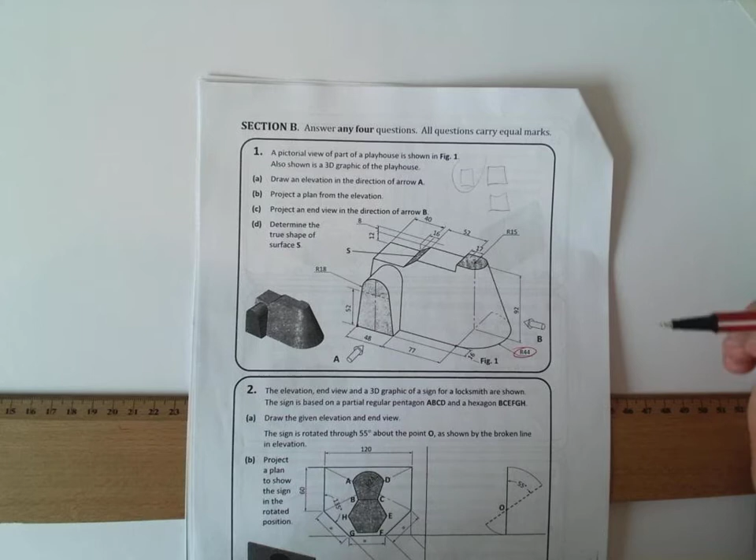For instance, we're told to project an end view in the direction of arrow B here into the right hand side. So when we project into the right hand side, the end view is going to be projected out to the left hand side on our drawing. So that's my elevation there and my plan, and then that's going to be my end view over here. So I'm going to use this as my starting point, and I'm going to work my way across. I'm going to put in some measurements.

As I said in other questions, I'm going to go through this slowly and explain different concepts, and you can just drive on, skip to the part that you're stuck with, and so on.

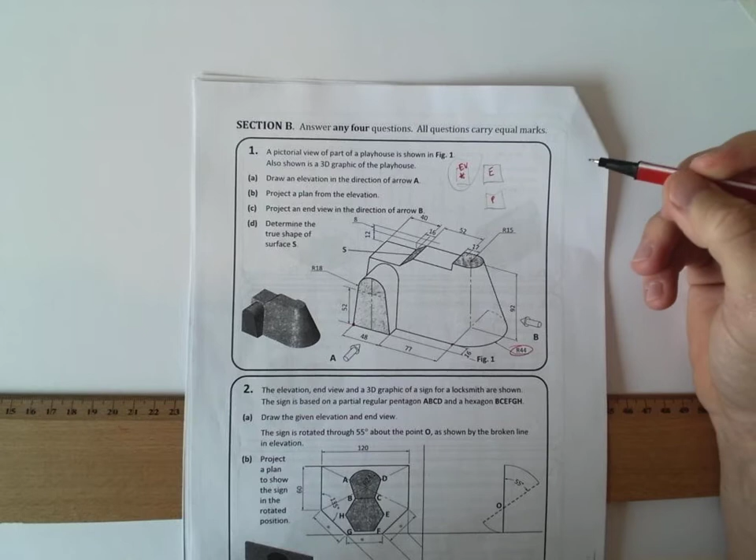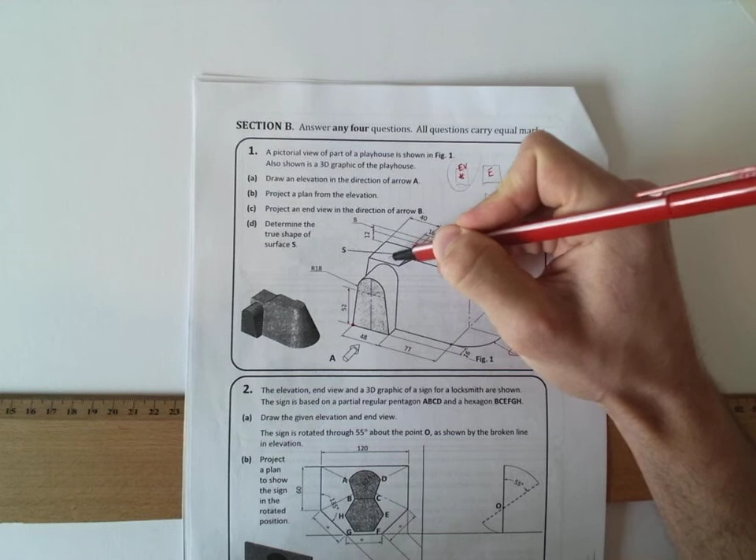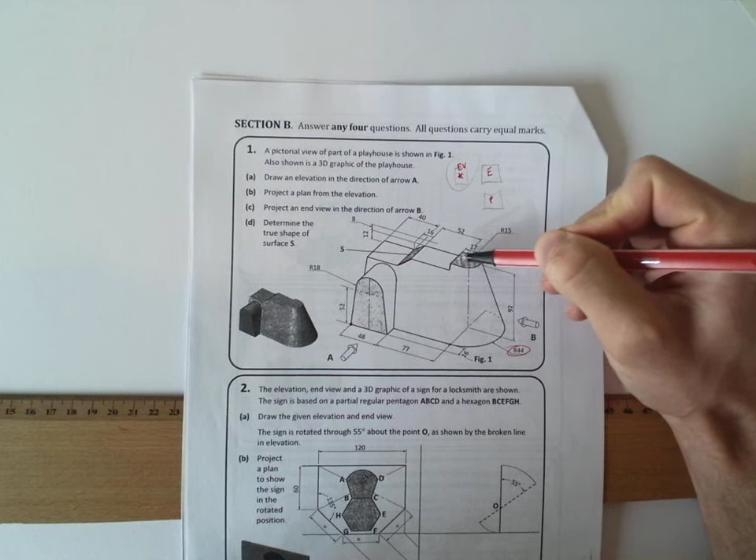Just another thing to note, the top here, it seems to be starting off narrow and then gets wider at the bottom. So this surface here, those lines seem to be parallel to each other, and this surface here seems to be parallel. So it looks like this here is going to be jutting out, and our surface S here, the wings of it almost, are going to be jutting out as well. So we're probably going to have to project an end view first before completing our plan, to find those widths at the top. So we'll go ahead and start off and draw our elevation first.

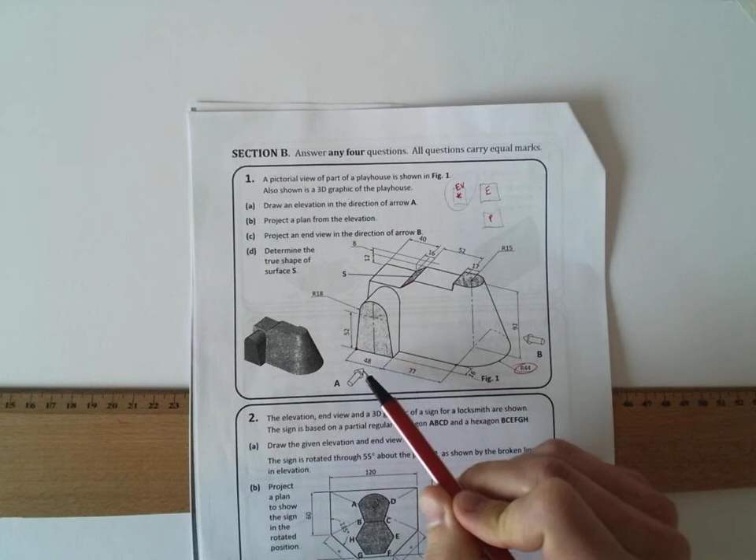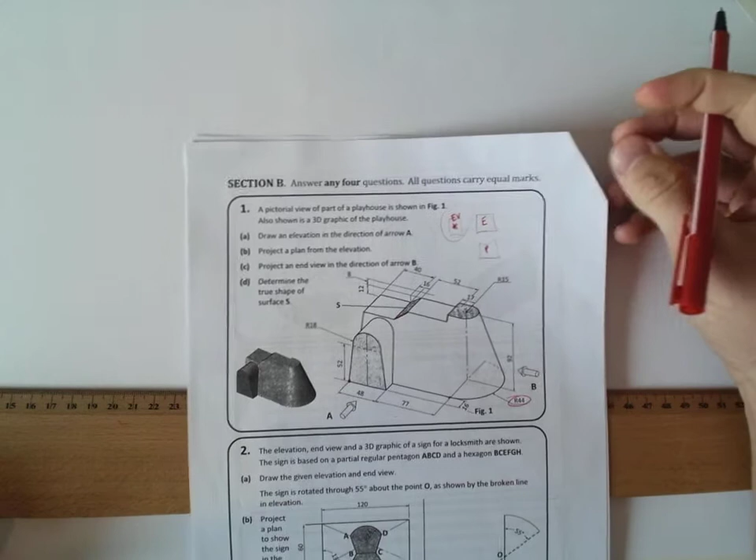So first thing to note, the height of the overall thing is 92, and the overall width 48, 77 is 125, and 44, so that's 169. So I'm going to come in about 180, give yourself plenty of room, and come down about 100 off the top of the page. Okay, I'm just going to stick up this question for me.

Okay, so the overall height 92, so we're going to come down about 200. What did I say? No, sorry, 92, so we're going to come down about 100, 110. That should be plenty. I'll just draw a horizontal line there, nice and light. And the overall width we said was about 169, so if we come in 200, maybe that should be fine. And I'll just draw a vertical line there. Okay, so elevation is going to be here. 92, yeah, there was room.

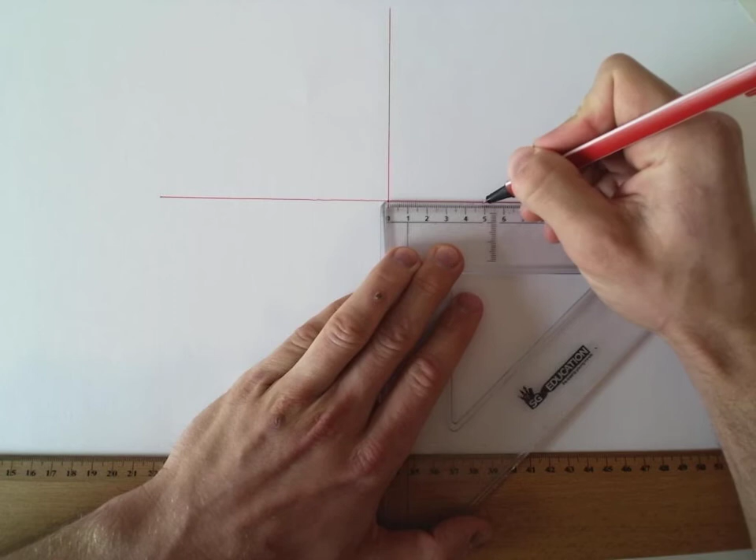Okay, so put in some measurements. So working from the bottom across, 48 is our first one, 48, and 77. So as I said previously, you guys don't need to wait for me, you can drive on and don't have me slowing you down. And then 44 is our bottom, so that's the radius in the bottom right. You'll see that R44, so that just means it's another 44 out, and it's going to be a curve.

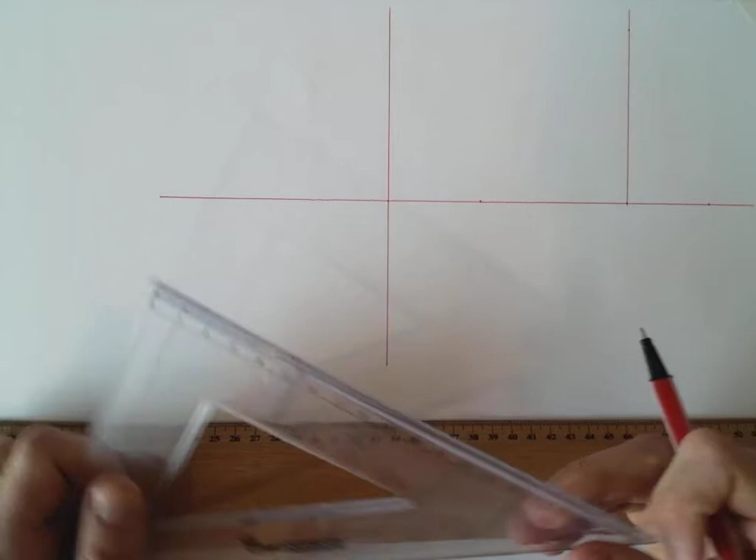Overall height, so I'm going to use this one because it seems like this one is the one with the height 92 on it. So step up 92. So that's coming in another 77, that one. So up to 92. And that juts out another 15. What we do is I pop a little horizontal line there, so I'm not measuring on thin air. Okay. Just get the focus perfect, right. And measure out another 15 up here. Lovely. And what we can do is we can join that down to the bottom, because we know that's the extreme right hand side. Okay, so that's that bit completed.

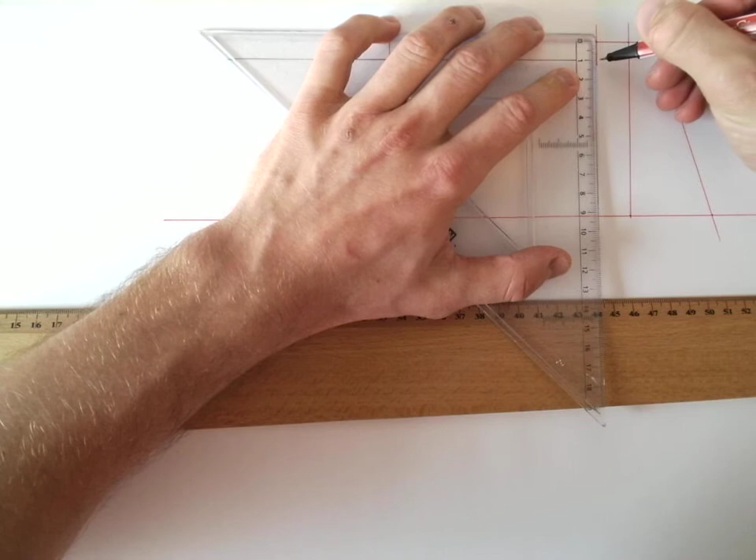We came in 15, we know, sorry, to come in another 17. There. That's a little vertical line there that comes down. Will that look vertical? Yeah, well, and that comes down 8. So we can measure down 8, there's 9, there's 8 there. And that's a horizontal line for 52, but instead of measuring, I'm just going to draw a horizontal line first, and then measure 52 on it. There it is there, 51, 52, yeah, perfect.

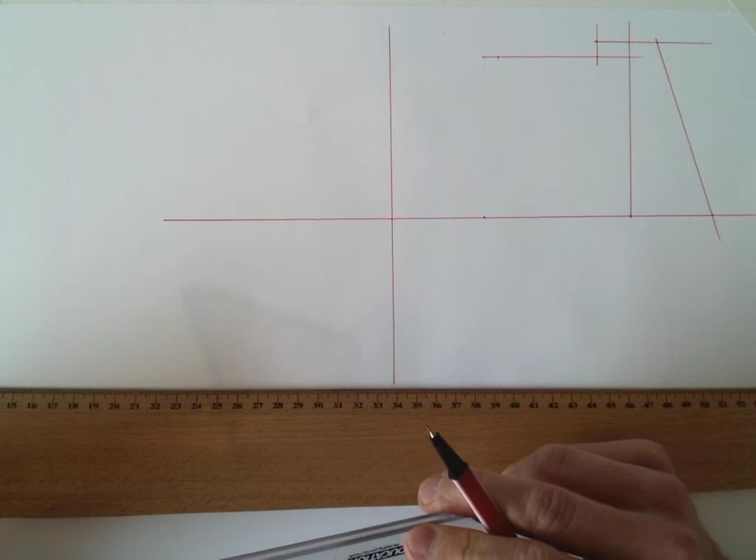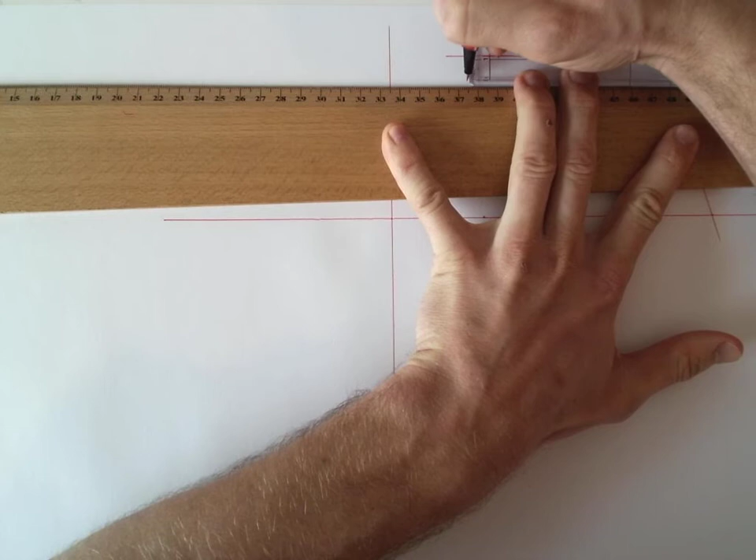Okay, the next part is our surface S. So that's where we are. We're working our way across the top of it now. Excuse me. So 16 across. So I'll just measure across that 16 first, and then measure down the way. So there's 16. So that's our original marker. To make that a bit bigger. So there's our 16, and that has a vertical drop then of 12. Okay. 12. We're not far off it. Yeah, there we go. And then that just finishes it out to the end. That should be 40. Yeah, bang on. Right. Good start.

Okay, so the front part here, 48 is the width of it. So if we just measure in 24, that should be the center of it. And a vertical line there to measure up the 52.

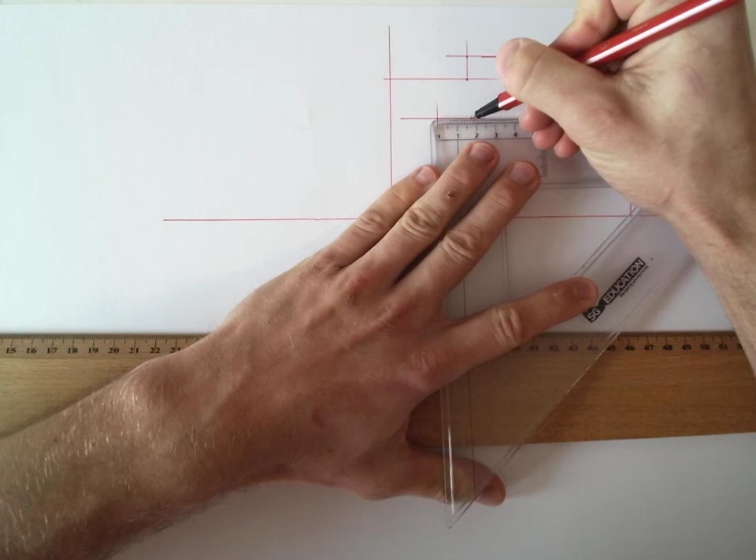52, and we want to pop in the radius here of 18. So I'm going to measure it first. 17 and 18. Use your compass, of course, to construct this because it's just a semicircle. Okay, so I'm going to go over it a couple of times with my compass so you can see it a bit better, whereas obviously you don't need to do that. Sorry. Right. And that goes down to the bottom wings then.

So as I said, guys, anything in red is construction. Anything in blue, I rarely use blue, but when I do, it's only instruction. You don't have to put it on your sheet. And then black is obviously anything in heavy. Sorry, I forgot to complete surface S up here. So I'll actually show you that, how I worked that out.

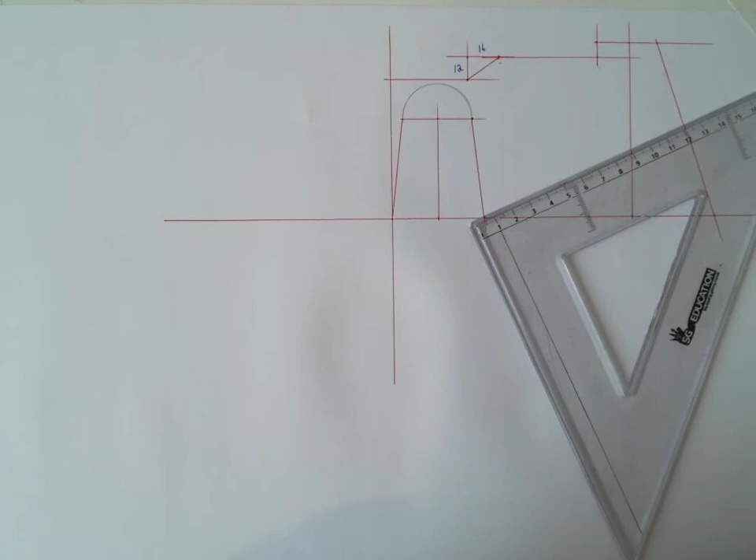So I came in 16 and measured down 12 mil, and then you can just join them up. Alright, so this is when I came in 52 that way, found that point, and that's your surface S there. Alright, so that's very important. That'll be very important down the line. That's our surface S.

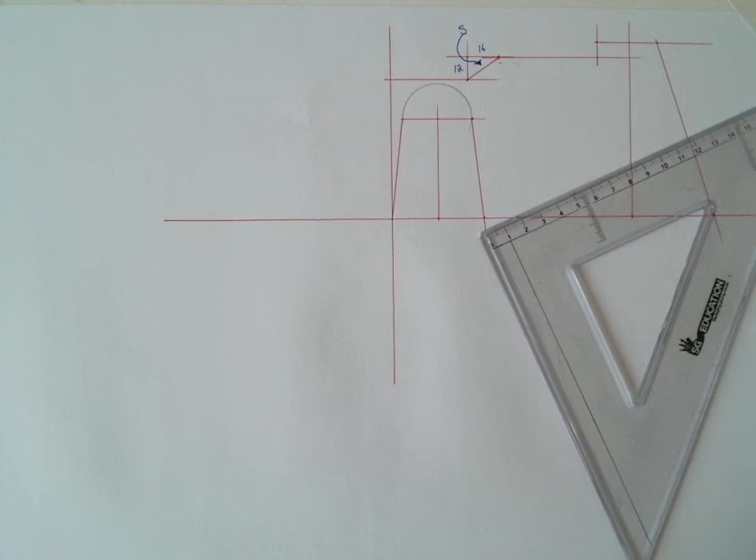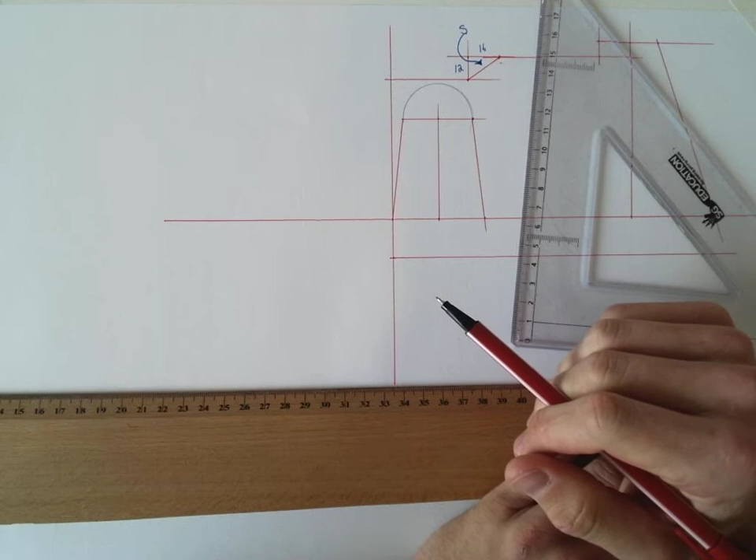Moving on. Okay, we're going to construct our plan. Right, so our plan should be 20 mil below. Should be plenty. So I'll just pop down 20 and draw a horizontal line. We know the full width of it, so it's kind of slanted, but if you look at the very bottom, we're going to work with the radius 44, so that means it's going to be 44 either side of the center line. So from there I'm going to pop in 44, and I'm going to pop out 44 the other side of it. So I'll measure that 44 now.

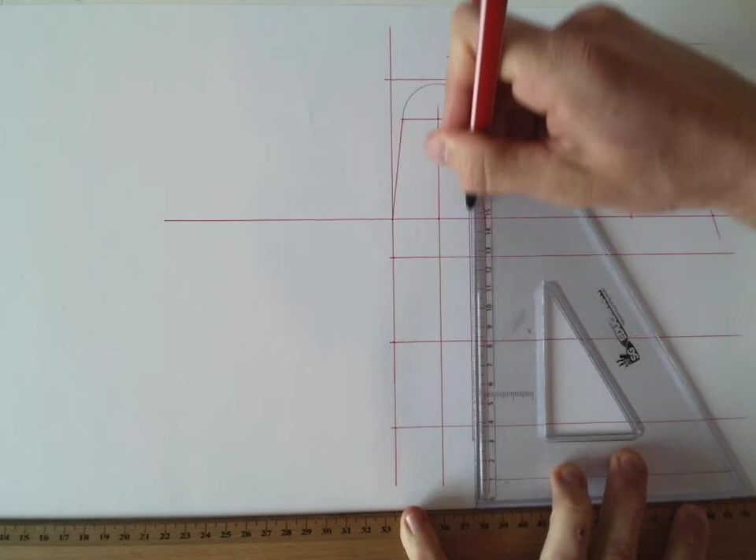So there it is there, right? And that's just going to be the center there, and that's my 44. Next thing, I'll bring all my important lines from my elevation down. Now notice how I go away from the last thing I just drew, so don't go back over yourself almost. Okay, sorry, I know I just did it there, but try.

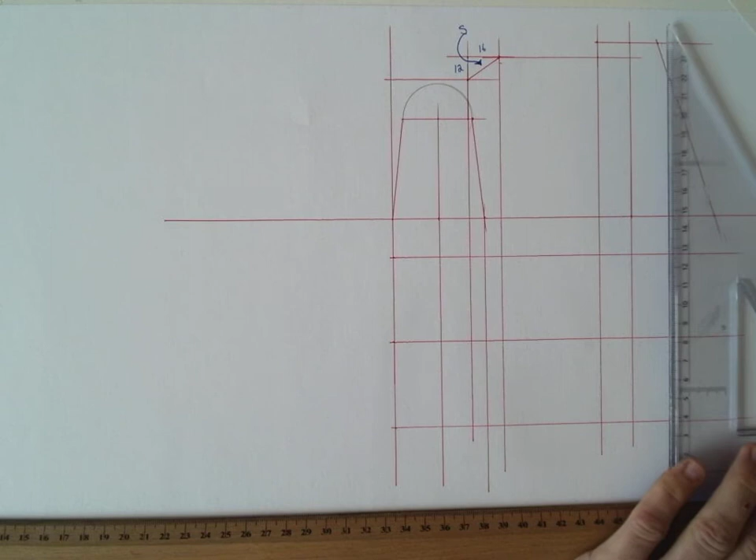When you draw a line, try to work away from that line you just drew. So I just drew a line here, so I'm going to work that way. Alright, I'm not going to go back over myself. It just reduces the risk of smudge, alright, because it doesn't look nice on our drawings. And then that's our last radius there. And we'll find that one ourselves, no bother.

Alright, so the only real width I can put in here is that radius 15 at the top. Alright, so that's the only real width we know, because it kind of looks like it widens as it gets to the back of it. So the only real width we know is that 15. So what we're going to do to help us is we're going to draw the end view. Alright, we're going to draw the end view, and that'll help us find those points on that slanted edge.

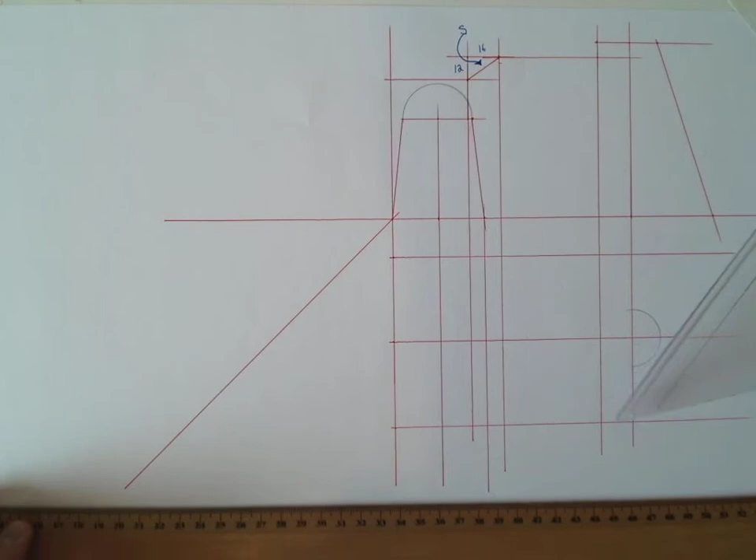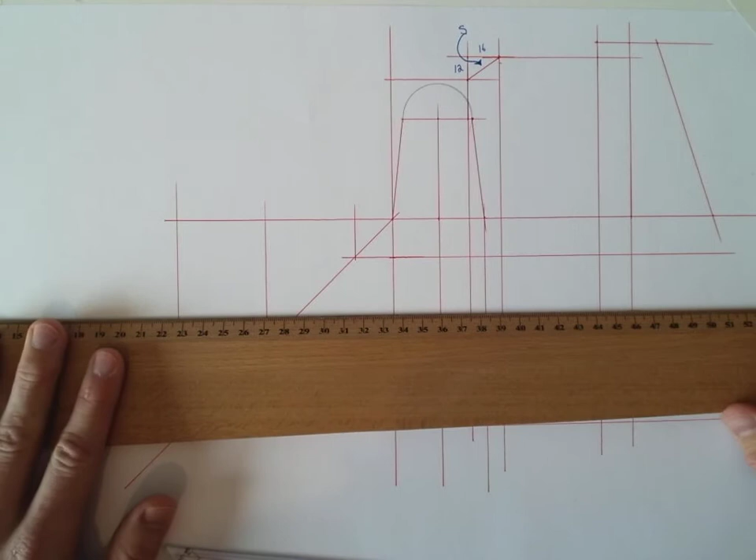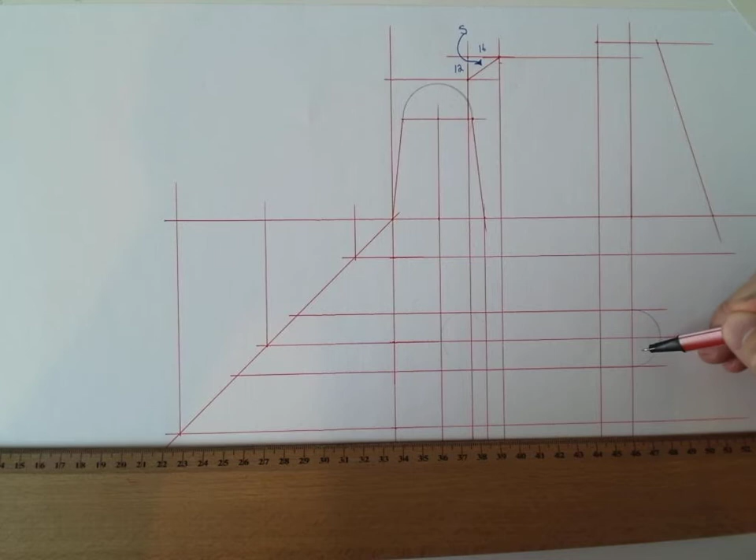So as always, pop off at 45 degrees from our elevation and bring all the widths from your plan across. And bring them vertically up then as well. You can actually bring this 18 across. Is it? No, sorry, it's 15, isn't it? Yeah. So you can bring that across, because that's the only width we're aware of. And if you look at the question, that's an important surface because we know the bottom goes up to that surface. All right. So I'm going to bring that across as well.

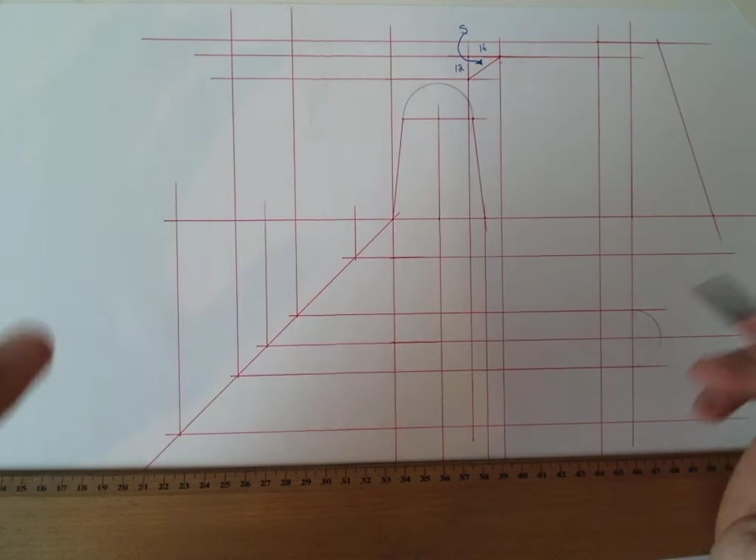So next thing, sorry, bring our heights across. So bring all your heights across. As I said, anything red is construction, so that should be nice and light with a sharp pencil. Okay, you should barely see it. And you know what, I'm going to leave that little bit jutting out at the front to last because there's a freehand curve in it and I don't want to put too many lines on the page just yet.

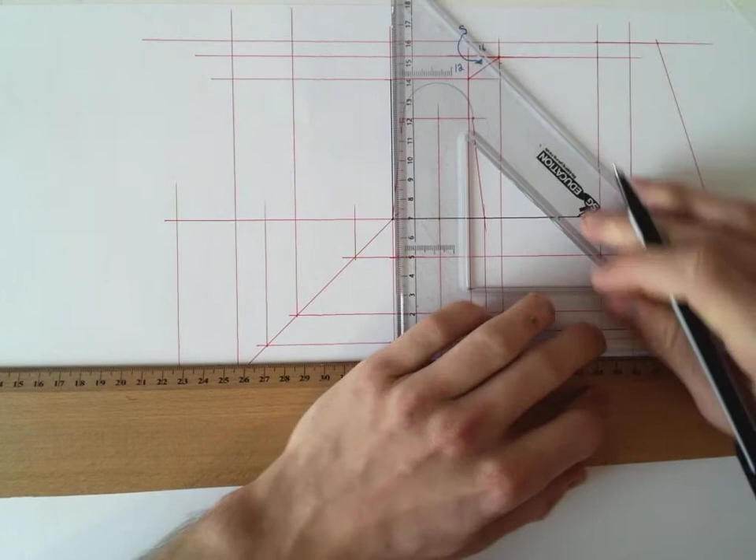Okay, just to make it a bit clearer for you, I'm actually going to put in as much of the elevation in heavy as I can because it's starting to look very red. Right, I want you to be able to differentiate between the elevation and so on. Okay, so I'm going to try to draw as much as I can. So I'm going to put in all my vertical lines first. Okay, and I'll work with my horizontal lines.

So watch how efficient I'm trying to be with my lines. So I'm doing all my horizontal lines together, vertical lines together, and so on. And then the other lines that are angled, you can just go ahead and do them last. Okay, so you can start to see the drawing come together a bit better now when you're using the different... well, I'm using different colors, but when you go on heavier, you'll see the part of the drawing that you want to stand out will stand out.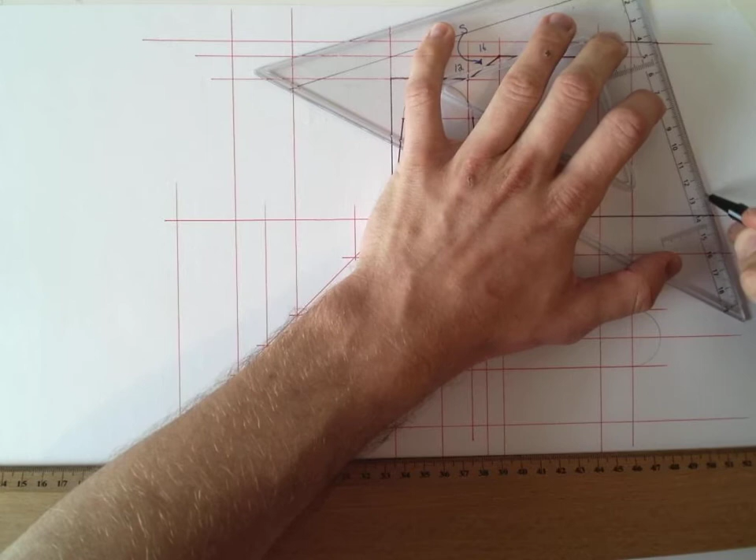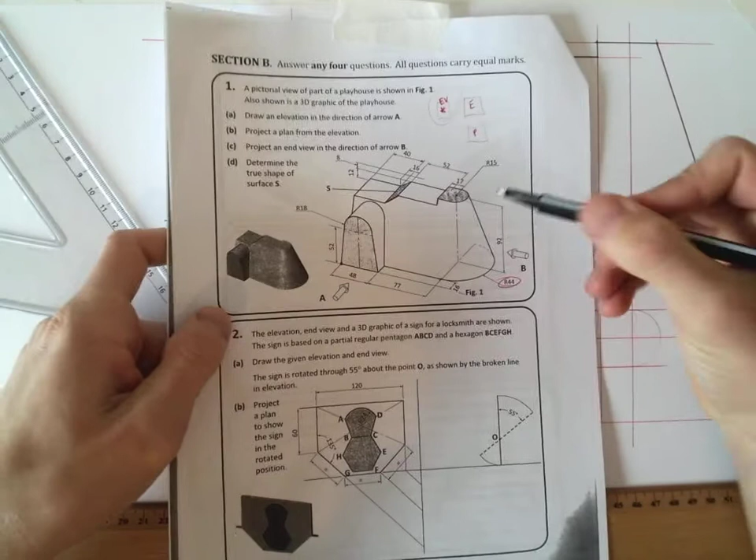Okay, so you can see my elevation right there. Plan, I don't have much of it yet. Okay, so we're going to try do some of this end view. Okay, so we're looking in direction of arrow B. So if we're looking at the question right now, if we're looking in direction of arrow B, the first thing you're going to see is this curved surface. Okay, you won't actually see a definite line, so it'll just be the curve.

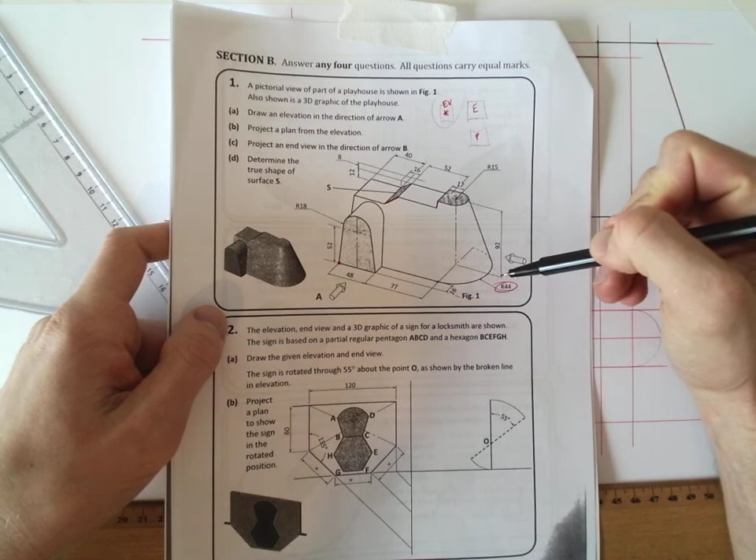But what you will see is the extreme left hand side and the extreme right hand side will just be represented as a line. Okay, so that line, basically, we need to find it. But if you were to draw it here, you would say we need to find it some way like that. Okay, sorry, it should probably be something like this because it's almost like a cone at the front of our drawing. Okay, so that curved surface there is almost like a cone, and you know if you look perpendicular at a cone, you're just going to see the left and right hand side of it.

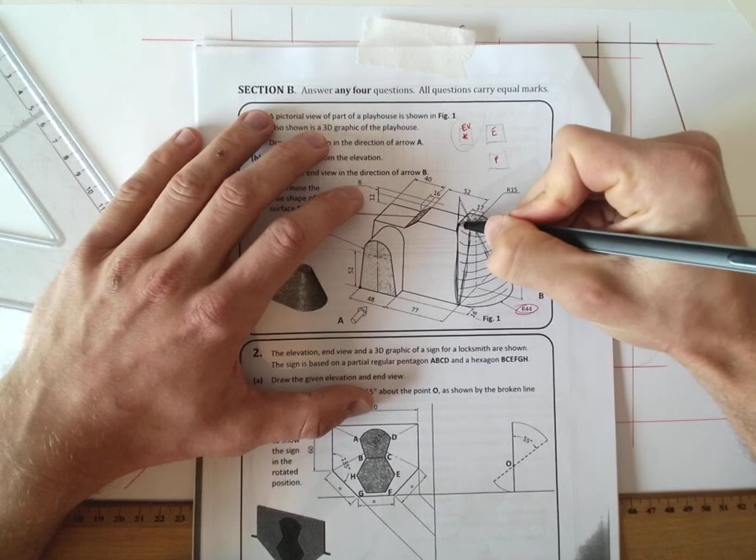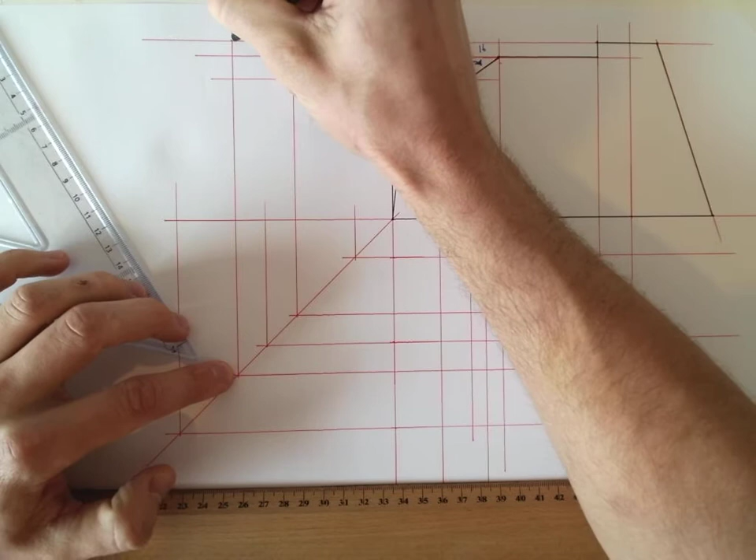Okay, so if I was to extend that on there and extend that on there, there you go, you can start to see the cone come together. So what we need to find is this left hand side and the right hand side, and we know they both join to that height there at the top. So what I did there is this height here is that width. Okay, and we know it joins to that, so I brought that up, and I can similarly do it down here, bring that across and up. Okay, and that's our extreme left and right hand side.

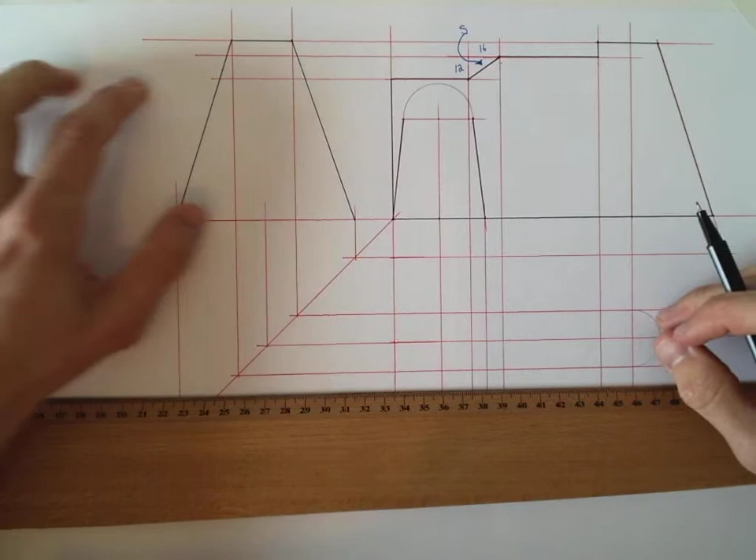And looking at our question, yeah, we can go ahead and put that in heavy. Right, these are two important lines that help us find the widths in our plan. Perfect. Right. And then the top will just be a horizontal line here. Okay. Now to find our widths. So this is where the extreme left and the extreme right of this surface of this object will come into play, because see these edges here, we don't know the width of those in plan. But the end view will allow us to find that. So by projecting across here, when we hit that slanted surface, we bring those down to our plan, and that will help us find them.

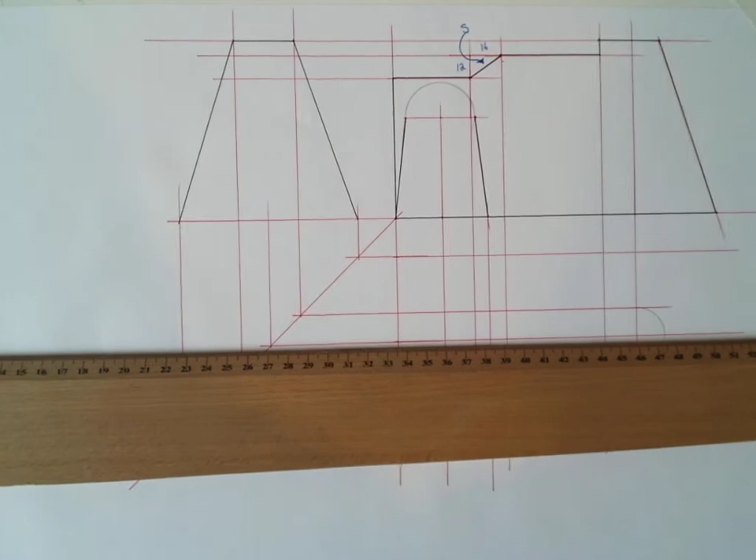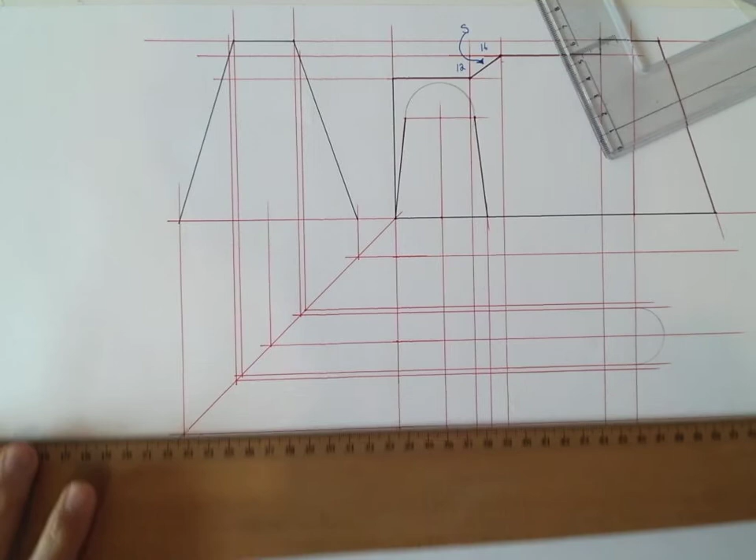Alright, so those that I brought across to our end view, I'm just going to bring them into our plan. And you can bring them across then. Okay, so that's this surface here that I'm trying to find. So this middle surface here. So I'll show you here. So what I'm trying to find now is this surface here on top. Okay, so that surface, the red surface there on top. Okay, so the width of it.

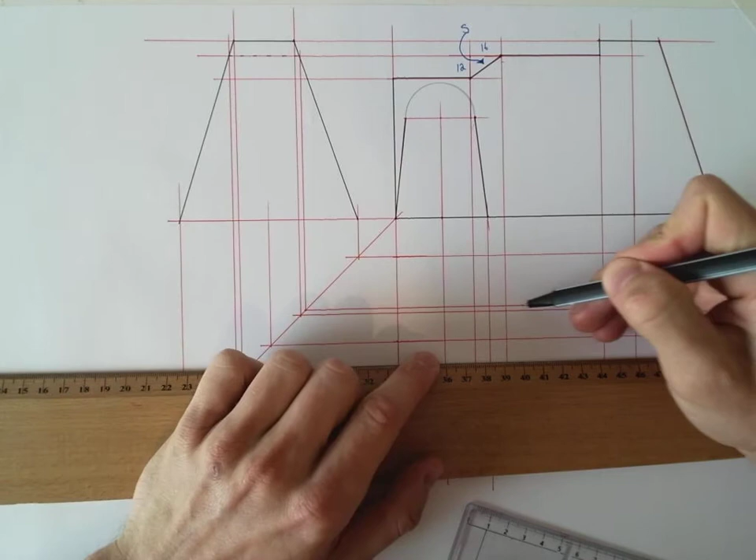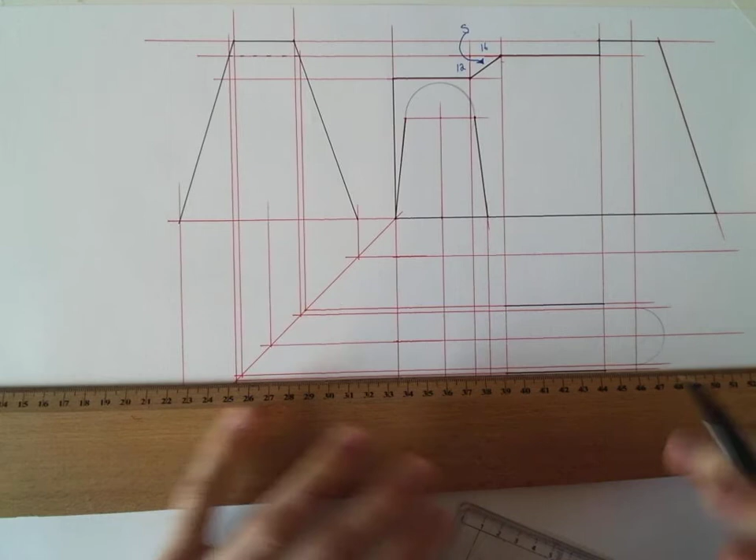So I came across here, and where it hit that slanted surface, I'm actually going to put that in. It's actually hidden detail because it's behind. So you can put that in there. So that's hidden detail there. And when the surface comes down, there it is there. So that means that has to jut out. So here it is here. Alright, so this is probably one of the trickier parts of the question, as it's just hard to visualize. Okay, it's just a small bit tricky to visualize, and that's jutting out that way.

Okay, so we're starting to make some progress. Alright, so that's one of the trickier parts of the question, is just trying to visualize that surface now. Right, surface S. Okay, so we brought our height across, so surface S starts here and it'll actually expand out. So we need to bring those down from our end view and into our plan.

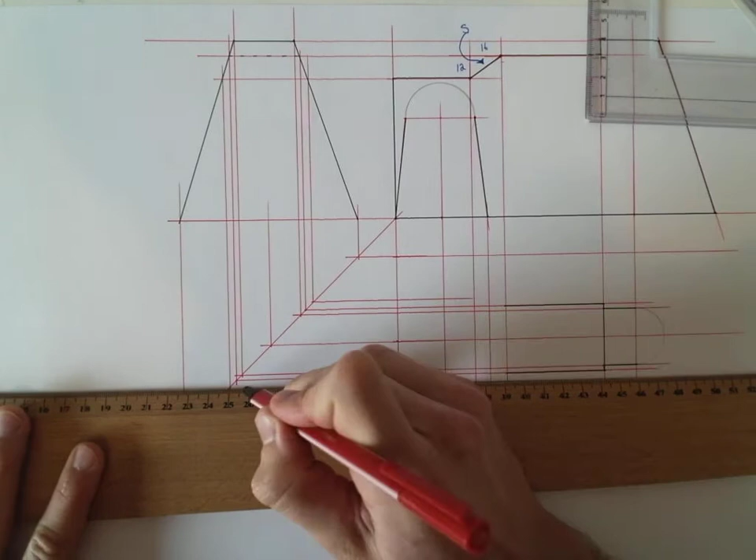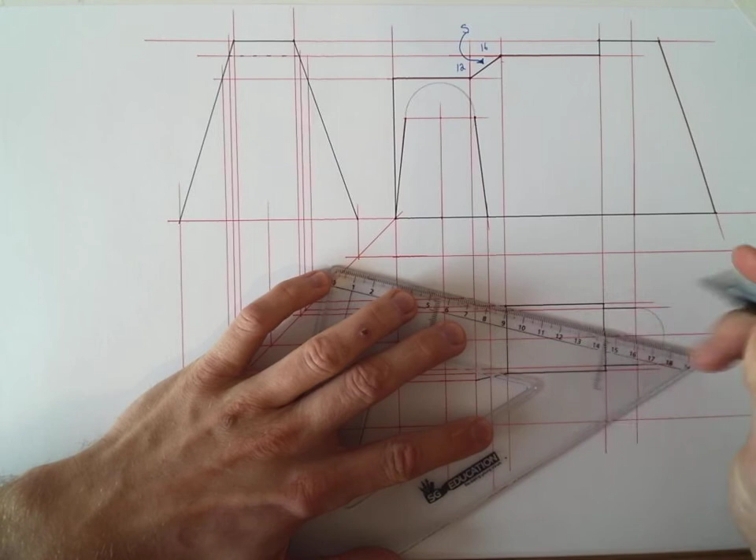Right, that stops there. And here's surface S being completed now. So that's surface S, I'm just after finding here. So that's the very important surface. So we're going to be asked to find the true shape of that surface later on.

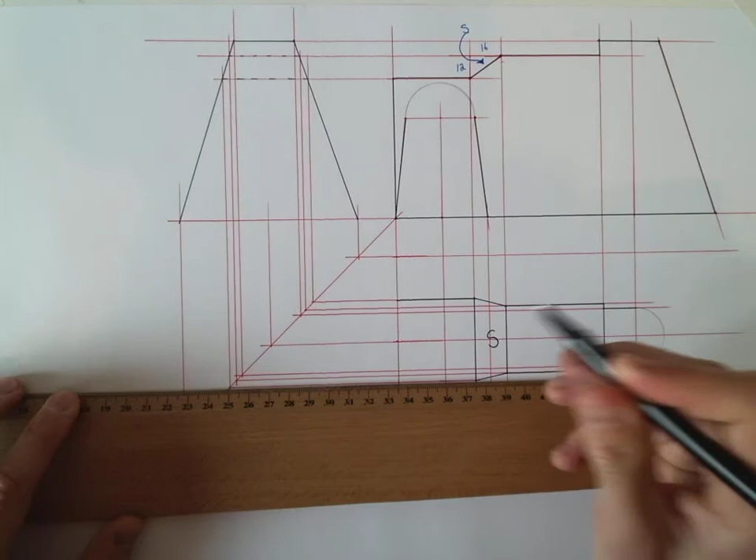And then the last bit, you can see it there. So it's actually hidden detail again. So that's the back of it. So you'd see it's that width. So we can just draw the two horizontal lines in. Alright, so that's very tricky, that bit, trying to visualize how it actually works out. And then the back of it is just a straight edge, so that can be just a vertical line. And I'm going to put in that curve at the front for us.

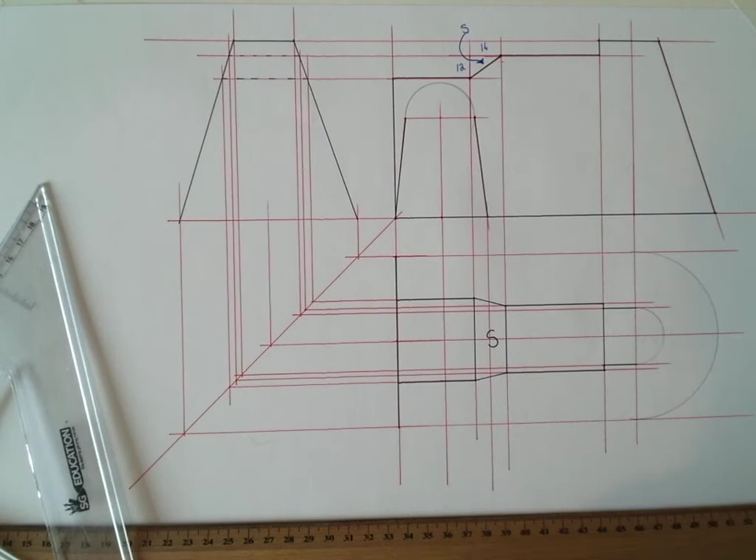So that should be 44. There it is there. Are they on the same center point? They are. Lovely. Alright. So that's 34. Just make sure we're accurate. Okay, so that's the plan almost completed. And there's the 44. And you know what, I'm going to leave that bottom part for a second because there is actually that bit jutting out at the front, so we'll put in that now.

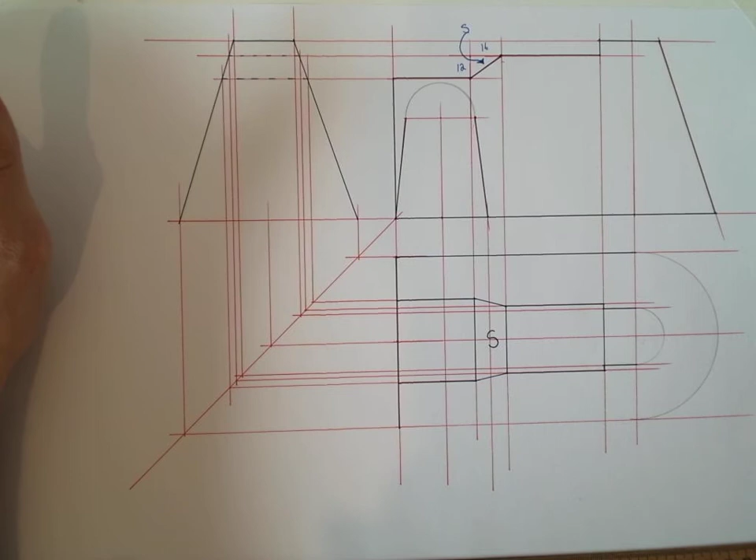So what we've done so far, just to take a little recap, just to check in with you. So the elevation is fully completed, the plan is not fully completed yet. We have to do this bit jutting out the front, and there is a freehand curve. So if we look at our question again, the freehand curve is there. That's the freehand curve I'm on about.

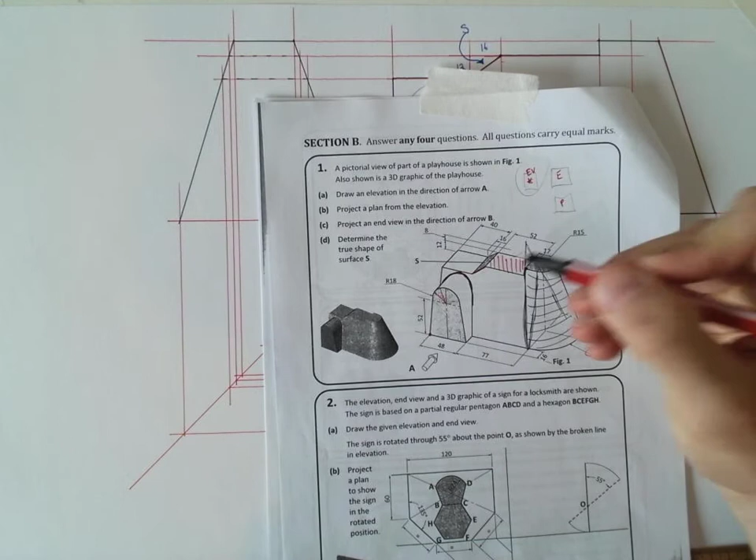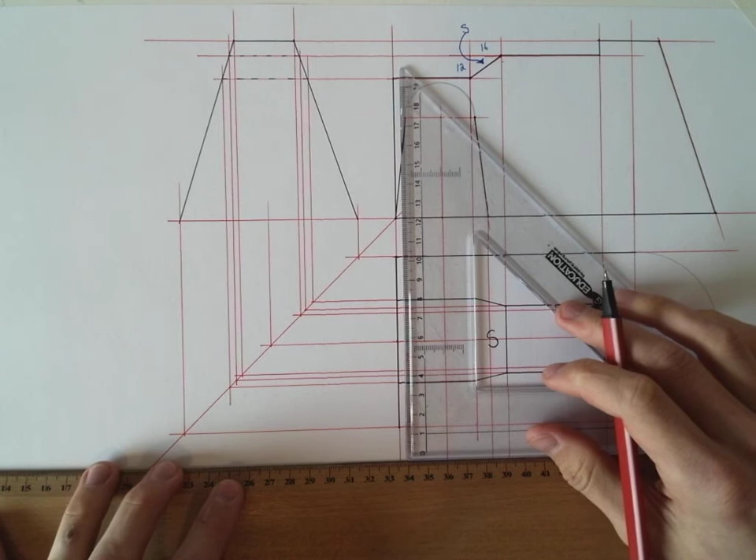Alright, so the way we find that is by 60-30 in our elevation and bringing those points to our end view and then relocating them in our plan. So we'll do that now. So first things first, I'll do the front bit that juts out. So that juts out 16 mil. So measure along a line, 16 mil, extend that bit more. That's not what I should draw, sorry, and that one.

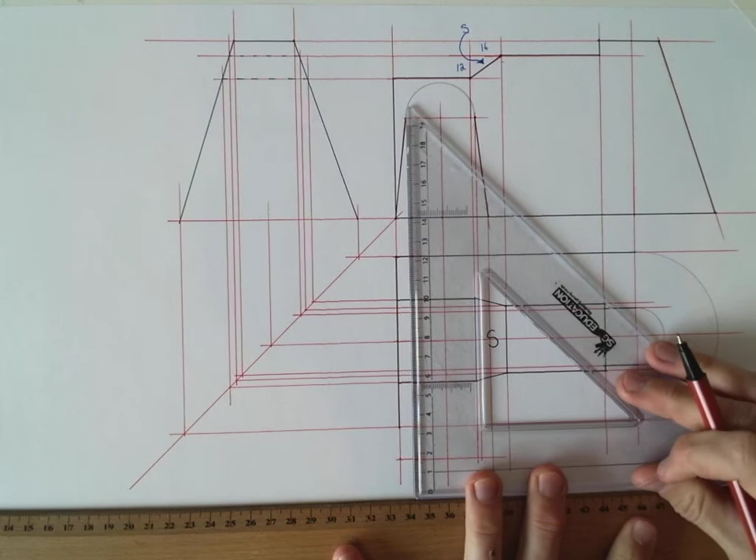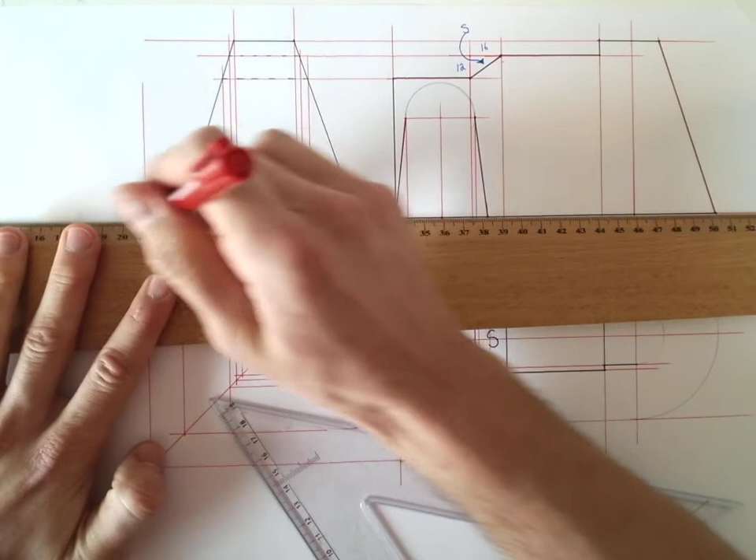And this one here as well. Okay, so that's basically the front edge there. First look at our plan, there you go. And then that juts straight back into the 44, and then that extends on out there. So what we're missing now is this freehand curve here. Right, how do we do that, I hear you say. Firstly, actually, I'm going to complete this end view, the bit jutting out with the end view. Extend that across, bring that out off it, and that as well.

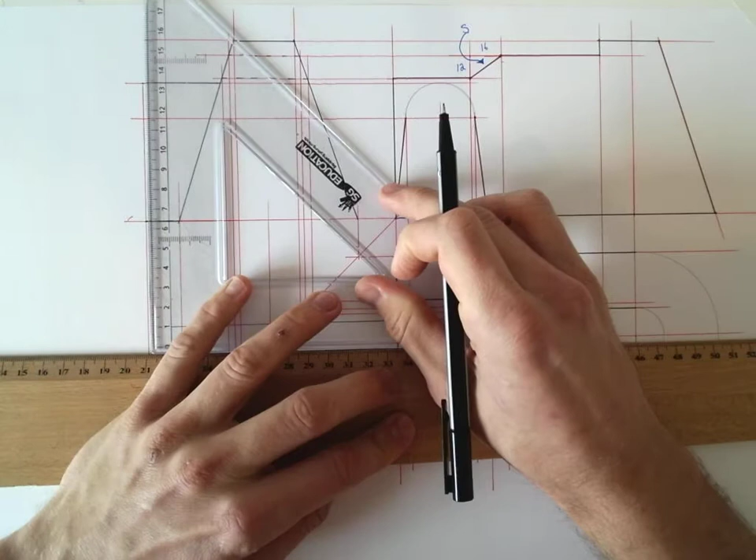So now we need to find this freehand curve. So we're nearly there. 22 minutes in, we're going well. So I need to 60-30 that semicircle in my elevation. Alright, sharp pencil is key here now, because you'll see there's a lot of lines starting to come together on the page. So this is where it's essential to have a sharp pencil and that our construction was nice and light, so we're not confusing ourselves. Okay, so I'm going to number these points here: 1, 2, 3, 4, and 5.

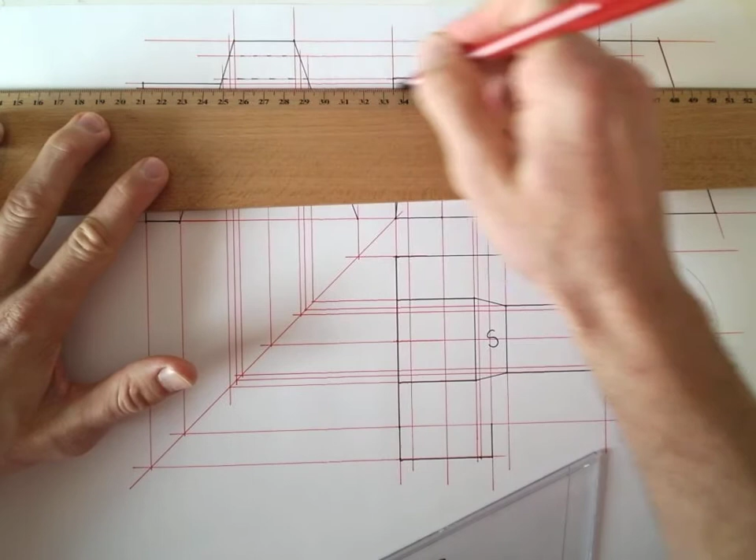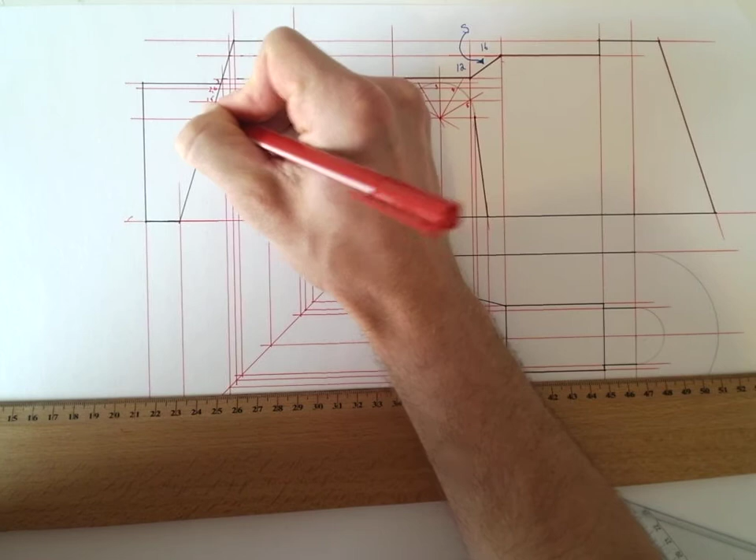Bring those across to our end view as well. And we'll number them on our end view as well. So here at the top is 3. If we were to look in, 2 and 4 are going to be on this. 1 and 5 are going to be here. And then down the bottom, we'll just say that's O. So center O. Okay. So, sorry about that. Here we go.

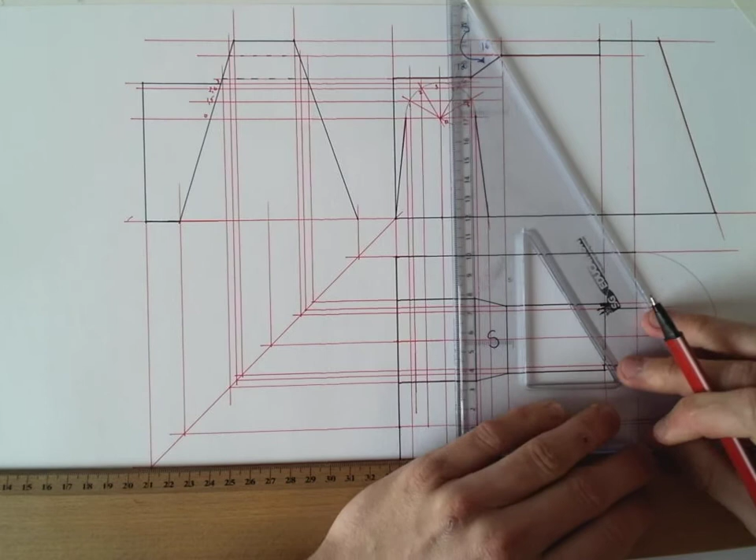So we're going to bring down our points as well into our plan. Alright, so there's 1 brought down, 2, 3, sorry, I should be extending them a bit more. 1, 2, 3, there's 4, and 5 is actually on another line we have already, so that's fine. Right, so what I've done so far: 60-30 my elevation, the semicircle, numbered my points, brought them down, brought them across to my end view, and now I'm going to bring them down from my end view as well. So do we need O?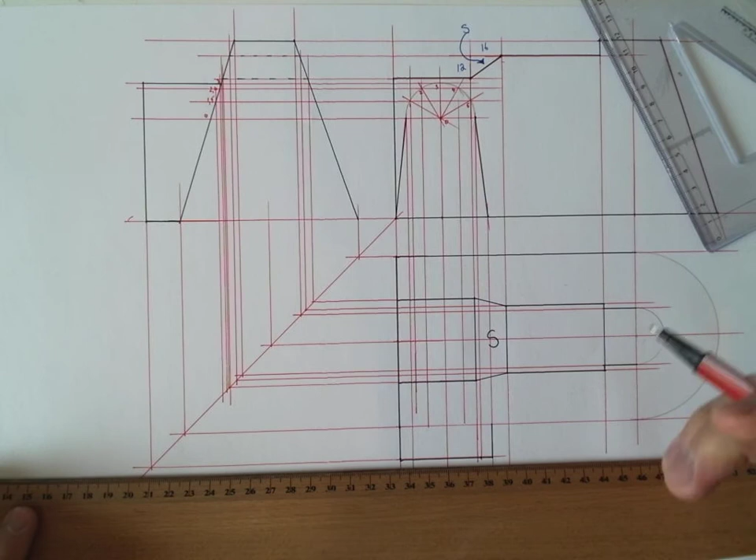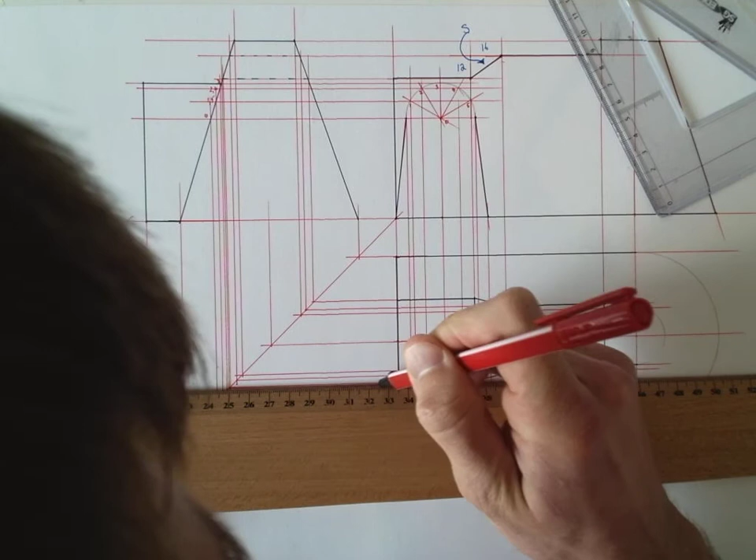We'll bring that last. 1 and 5 are going to be on this line, 2 and 4 this line, and then last but not least you're going to have 3. Alright, so sharp pencil is key here, guys. You'll see. Do you know what? We do need O because that's where the two left and right extremities are. Lovely. Right. So 3, 2, and 4. So let's say 3 is that one there. And 2 and 4. 1 and 5. And then O is the last one. Okay.

Okay. So we'll start numbering them. I know it's going to be a bit tricky. So there's O. So we know that O contains the left and right of our object. So if we were looking at our plan, yeah, okay, so there's 1, I presume. 1, 2, 3 is here. And then you can see our curves actually have to come together. Right.

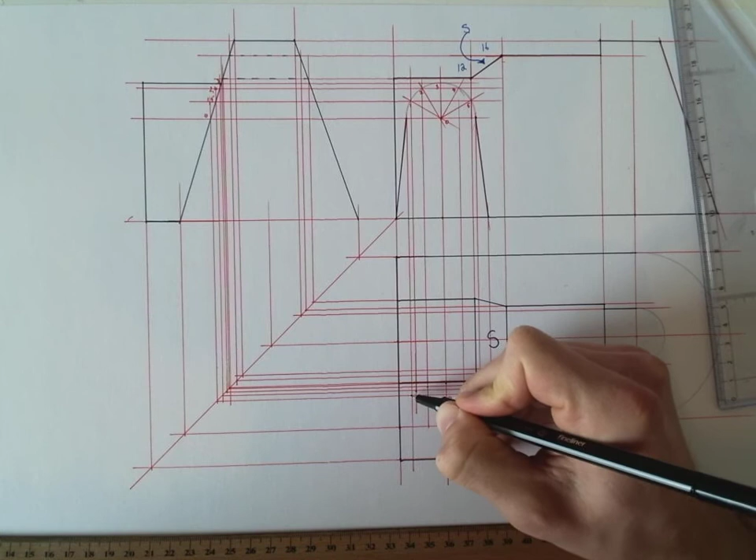That doesn't need to be freehand as far as here. It's just a freehand, right. So the freehand curve goes from O to 1 all the way around. So let's put that in. Okay, so that's a freehand curve.

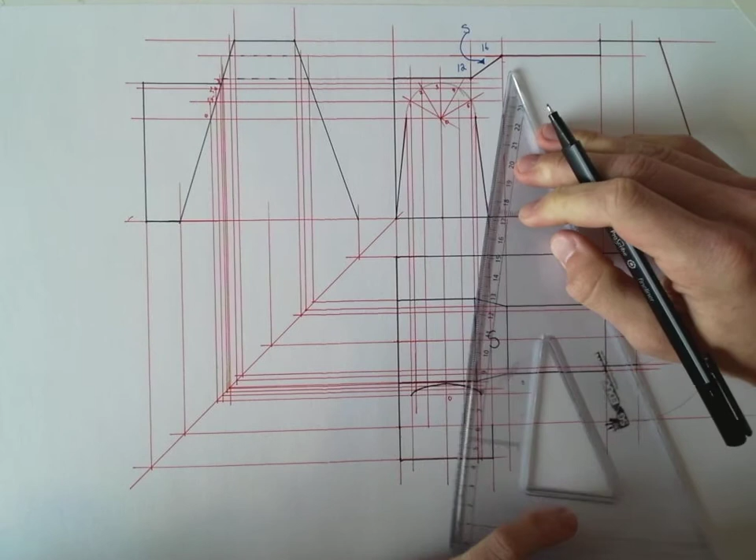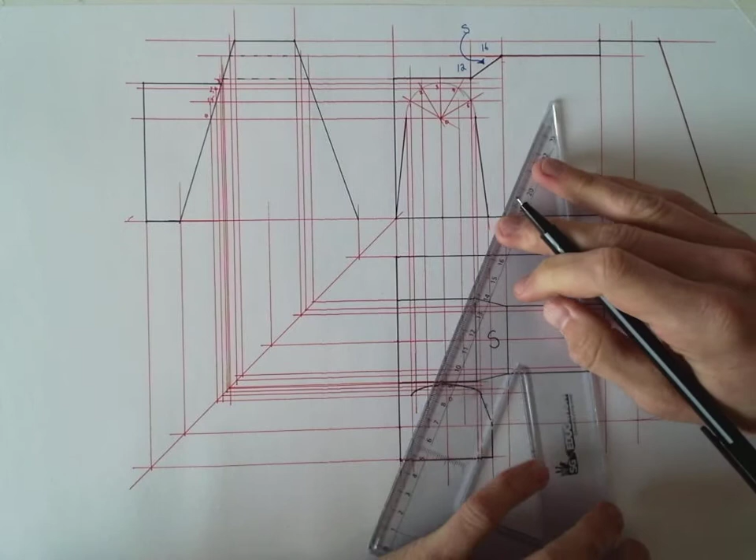And then, so we have O, lovely, and then that goes from, so we should look at the right hand side, that goes up to there, like that, and similarly on the other side as well. Okay, so there you are. So that's the curved surface there.

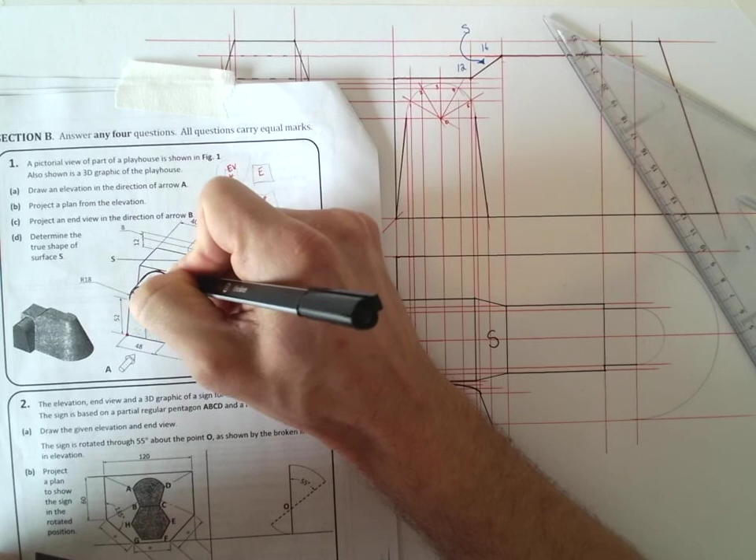And so what I'm after drawing there is, so what we're looking at here is this curved surface here. Okay, so that's what we're after doing there. Should that be a freehand curve there? No, because the freehand curve starts at O. So you see it starts there. That's the curve, it starts there. So the actual curve up here only starts up here. Yeah. Okay.

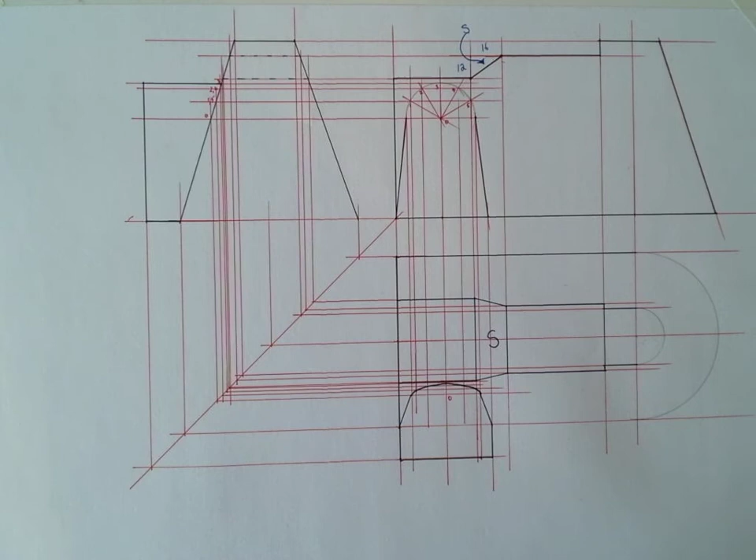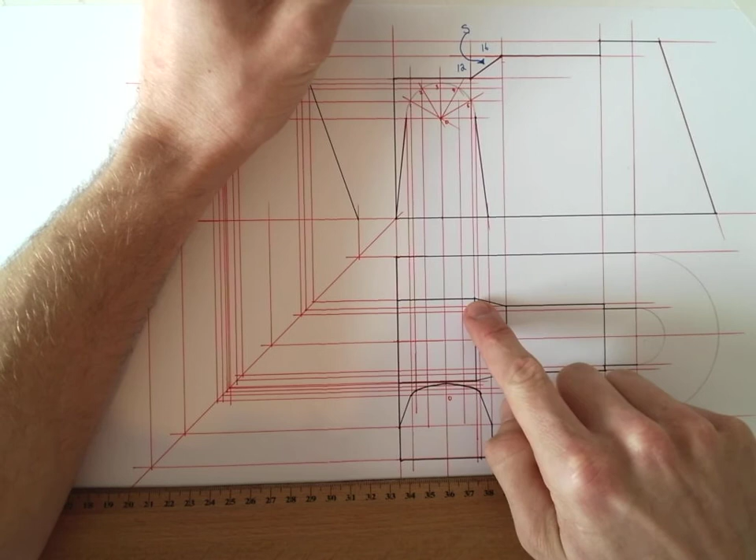And then we're going to use our widths in our plan, and we're just going to try to find the true length of it almost. So this edge here. Alright, so we're just going to flatten that down, and that's going to allow us to find it then in plan. So compass. So what I did first was I brought out a horizontal line here. And from the bottom I'm just going to flatten down surface S. So flattened it down like that.

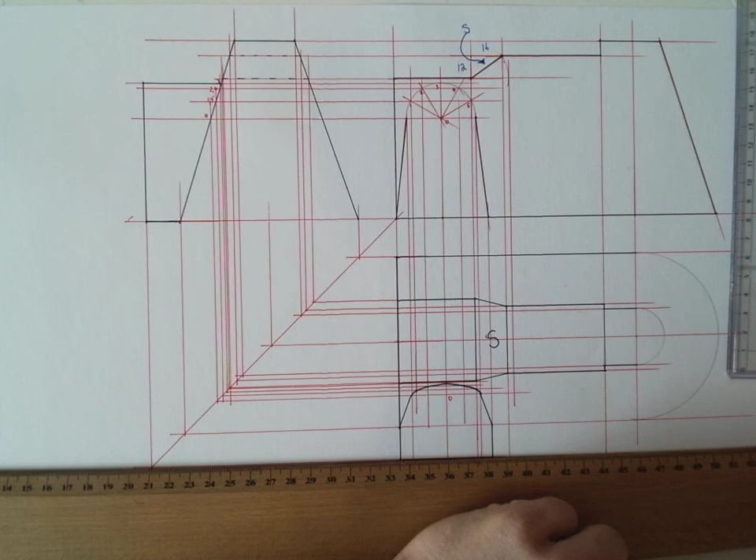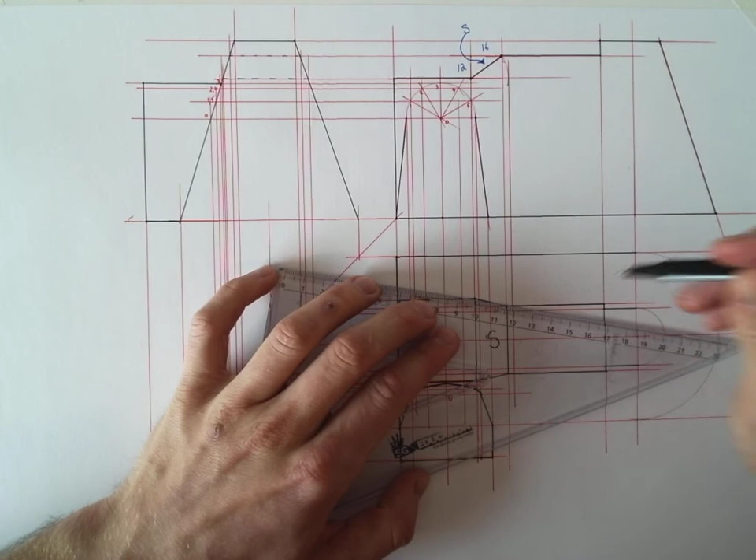So rotate it around down, and then when you hit that horizontal line you just drew, you're going to bring that vertically down. See what I did there? So I flattened that down, brought that around onto the horizontal line I drew out from here, brought it down, and because we have our widths, we can just use those to draw the true shape of surface S. So it's not much bigger, the true shape, but we still need to be able to show that we can do the construction.

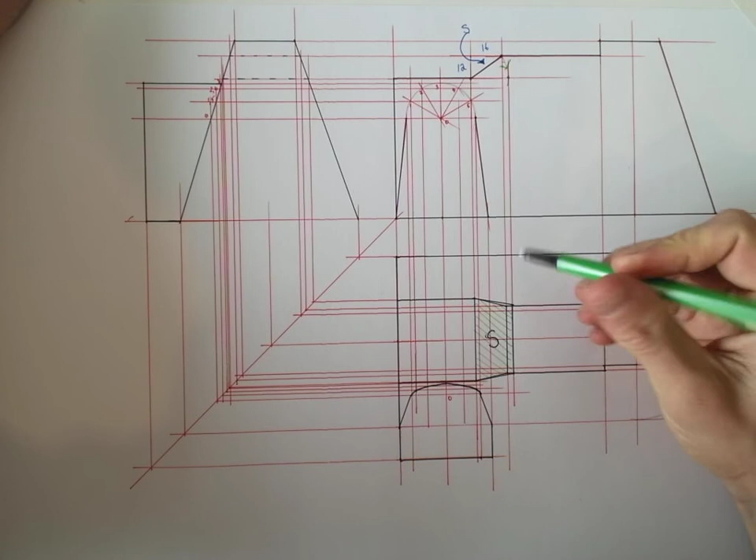Okay, and then what I'll do is I'll actually put it in green. Alright, so that's the real true shape of surface S. So what we did again was we put a horizontal line out here, rotated, so this is surface S here, we rotated that down until it hit that horizontal line, brought that horizontal line down, and then where that hit the narrow part of surface S, that horizontal edge, we just joined from there out.

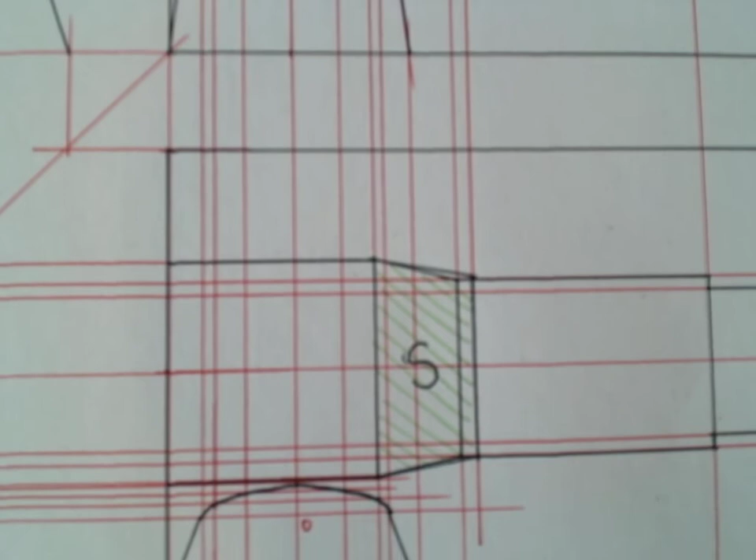So you can see there's not much difference here. Just because I'm using a fine liner, my lines are a bit thicker, but there is actually, can I bring it closer to you? So if you look at surface S, look at the top especially. There is a difference, and it is extended in length. So what we did is rotate that down around, bring it down to our plan, and where it hit that narrow part of surface S, that's our true shape. So that's what we did up there, rotated it down around, brought it down to our plan, and extended it on.

Okay, so there you have it. That's question 1. We've all our hidden detail here. We're fine there. Yeah, that's everything. I'm just looking at the question, just make sure we have everything. Yeah, that's the true shape of surface S. So that's question 1, orthographic projection.

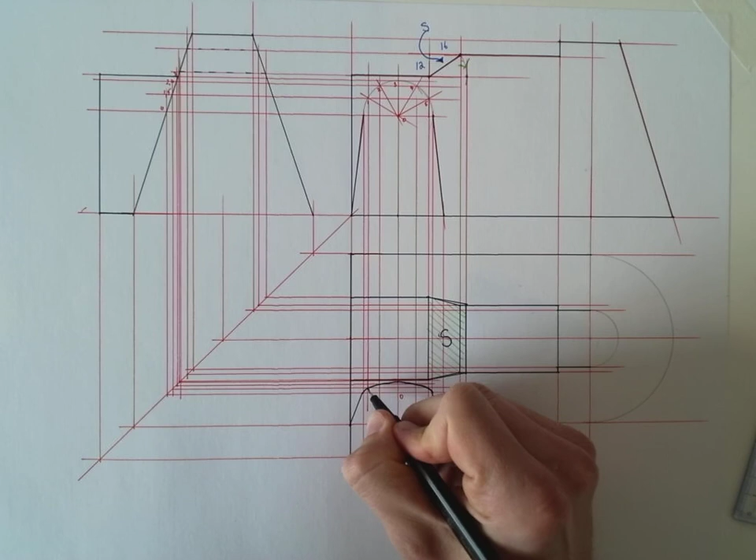And I'm just going to number these just to show you where these points came from. So there's 1, 2, 3, 4, and 5. So the procedure again for finding this curve is 60-30 in your elevation, bring your points across to where they hit this slanted edge, bring them down to your plan, and that's where you'll find them there.